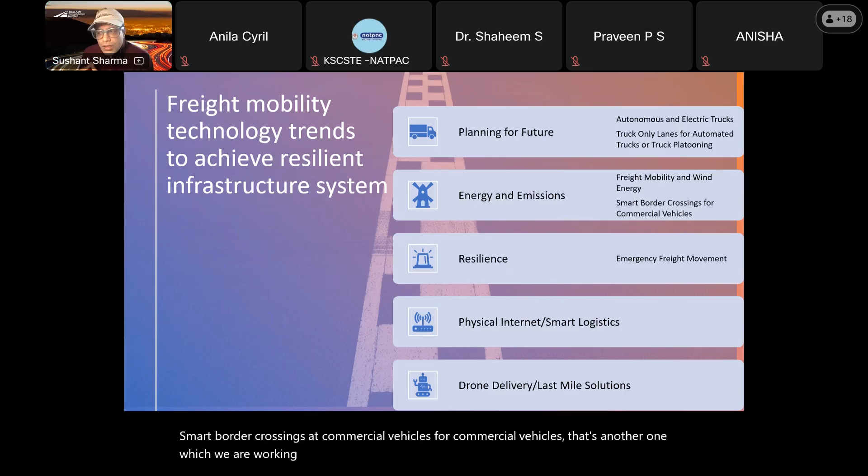Freight resilience, and resilience by itself, has become a big topic, and I think all of you will agree we've seen so much change in climate and weather over the years, and the infrastructure is still being pushed to its limit. We haven't thought about resilience before. We were more into sustainable solutions, but now we're getting into resilience, where we're thinking about what will happen in the next 100 years if the weather changes like this, and this is happening as we speak. So that's another topic I'll talk about under emergency freight movement.

And in the end, I'll conclude with some of the new topics that are upcoming; there were some good news in terms of logistics and freight. One thing is the physical internet, another one is drone delivery and last mile solutions. If you're in the world of freight, these are very, very big problems. And I'll go through that as well.

So if we take a step back, you may have heard of autonomous vehicles, right? It's a very big term. We are seeing those vehicles on the road. Electric vehicles, we are seeing those on the road as well, right? So both are happening more so in the world right now. And both these technologies are actually starting to overlap, where we are getting into the world of autonomous electric trucks.

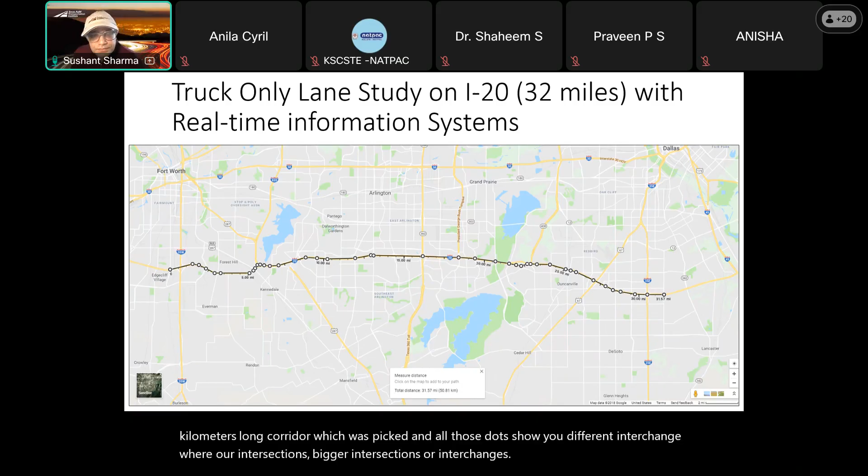So we started to question, what if this whole corridor is a truck-only lane, and they don't need to interact with cars? And that's a big problem, right? Interaction of trucks and cars becomes a safety and operational issue. The question was, what if there is a truck-only lane, how much efficiency can we derive out of it at the network level and at the corridor level, and is it even feasible? So to study that, we looked at something called multi-resolution modeling.

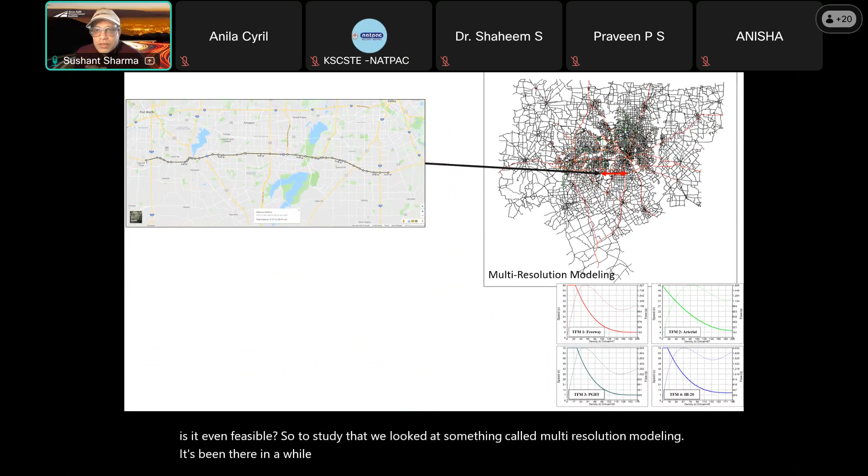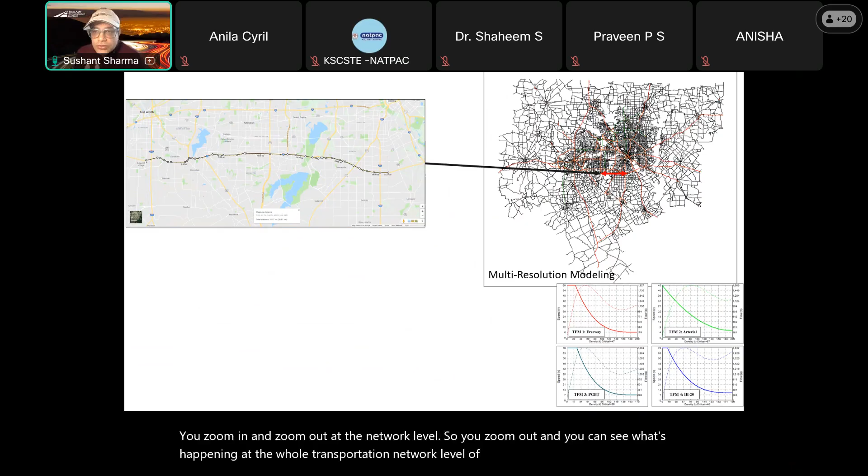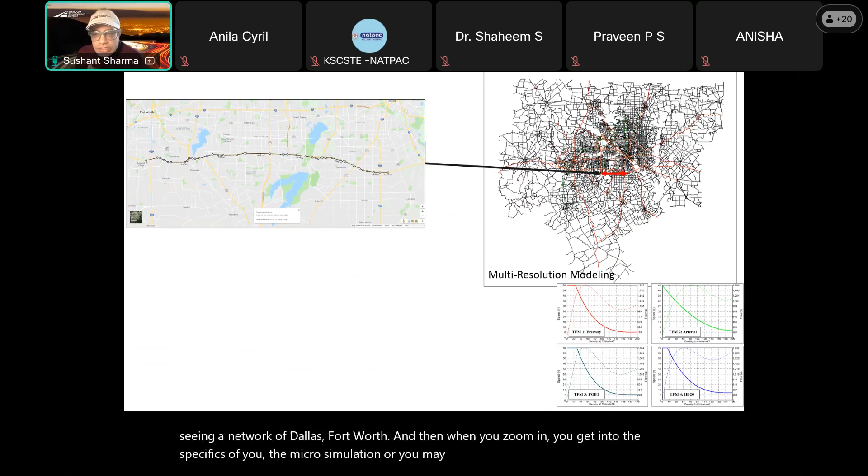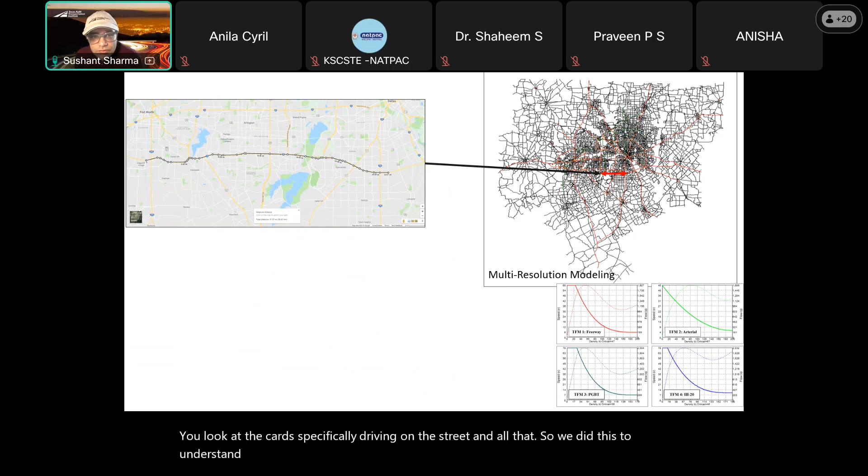It's been around for a while. What multi-resolution means is you zoom in and zoom out at the network level. You zoom out and you can see what's happening at the whole transportation network level of the city. Right now you're seeing the network of Dallas-Fort Worth. And when you zoom in, you get into the specifics of the microsimulation, or you may have heard the term traffic simulation. Then you look at the cars specifically driving on the street. So we did this to understand what kind of efficiency can be achieved by turning a corridor into truck-only lanes.

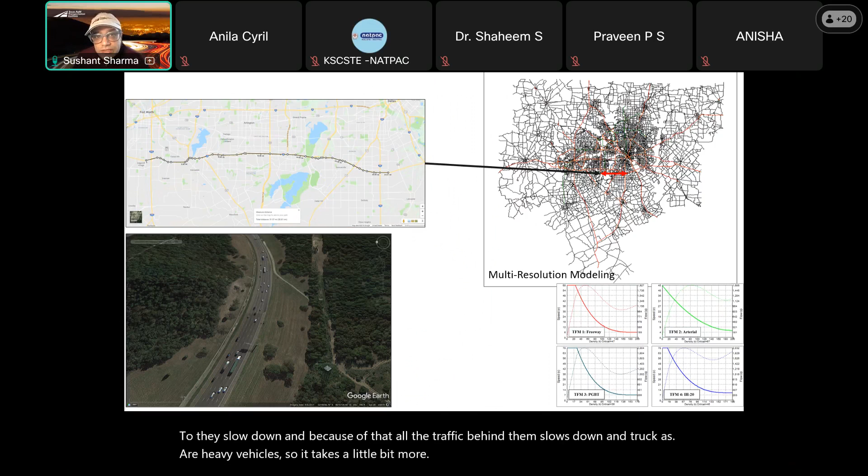And there are different bottlenecks throughout this corridor. For example, this image on the bottom left is showing where we have a very high gradient. Trucks have to climb this uphill, so they slow down, and because of that, all the traffic behind them slows down. Trucks, as you know, are heavy vehicles, so it takes a little bit more energy or acceleration for them to go higher up, and then it creates congestion, and it's going to be a big challenge to eliminate that kind of issue.

But this is what it is. It's the geography of the region. So the idea was, these are small different types of bottlenecks throughout this 32-mile corridor. What if we have truck-only lanes and we don't allow them to interact with cars and trucks? What will we see in terms of efficiency?

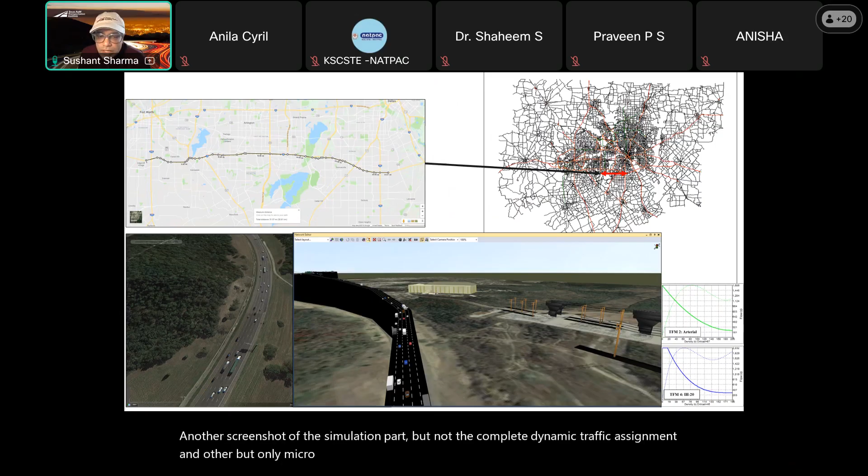Another screenshot of a simulation part, but not the complete dynamic traffic assignment, only micro simulation. And what we saw there was, okay, we can do that. We can do this at the corridor level. It kind of makes sense, but when we looked at the network level, it wasn't making much difference.

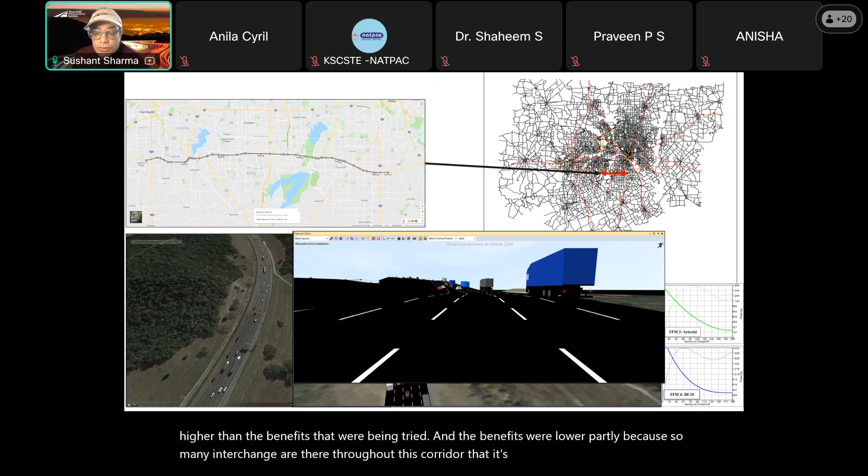Of course, it was kind of expected, but the reason it wasn't making a difference, even with such a long truck-only lane, wasn't the efficiency; it was that the cost of developing this infrastructure was higher than the benefits that were being derived. And the benefits were lower partly because so many interchanges are there throughout this corridor that it's impossible for you to gain the efficiency that you would like in the system.

So we could see, like, 10% of truck traffic will switch to these truck-only lanes, but that's it. The rest will be going to different parts of the network in the city, and that will not allow that much efficiency. We looked at the safety issues, how many crashes will be prevented by doing so. We looked at this problem from different angles, but overall the result was, we were not there yet.

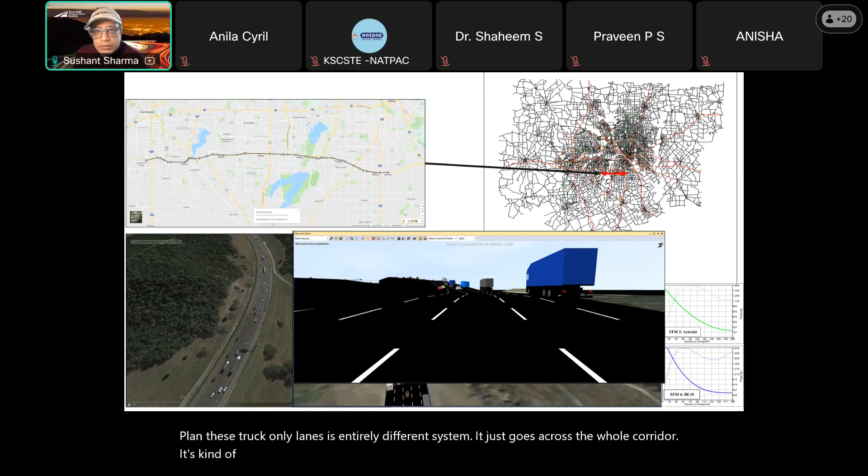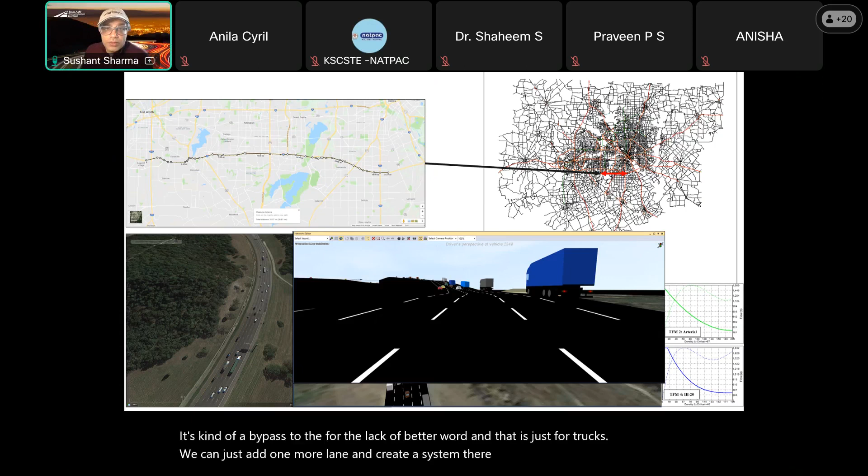We still have to plan these truck-only lanes as an entirely different system. It just goes across the whole corridor. It's kind of a bypass, for lack of a better word, and that is just for trucks. We can't just add one more lane and create a system there which will turn out to be good for autonomous vehicles or electric vehicles or regular trucks.

The second challenge which we face in the state of Texas is related to border crossings. I'm showing you the border of the US and Mexico. And there's a city named El Paso, and we have very high emissions in this city. Part of the reason is because these trucks are standing in the queue to cross the border, and they have to go through safety checks, documentation, and all that. And the typical delay in this region is like 1 hour to 2 hours.

So it's too high. And the problem we were trying to solve here was, what if these truckers and shippers have information ahead of time? How much is the delay at the border crossing? Will they be able to select the time of day they want to leave, and then reduce the congestion in some sense?

So what we did was develop an AI or machine learning-based predictive wait time and crossing time system. And there are 2 types of lanes at the border crossing: FAST lanes, where you already have the information of the people who are driving the truck, what's in the truck and all that, and then non-FAST lanes. They pay some fee for FAST lanes, so it's kind of a paid toll. But the question was,

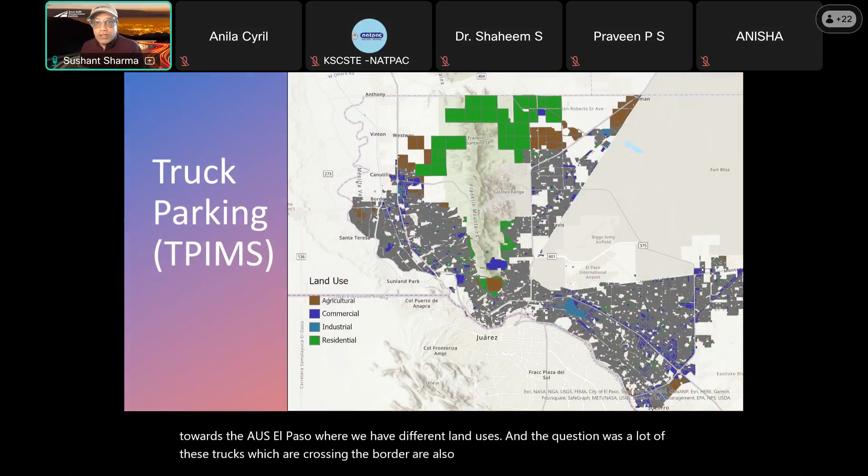There was another challenge related to it. So this is El Paso at the US-Mexico border. It's towards the US, El Paso, where we have different land uses. And the question was, a lot of these trucks which are crossing the border also have to park and stay in different parts of the transportation network in the city. How many trucks are staying within the city, for how long? And how do we calculate that based on the land use?

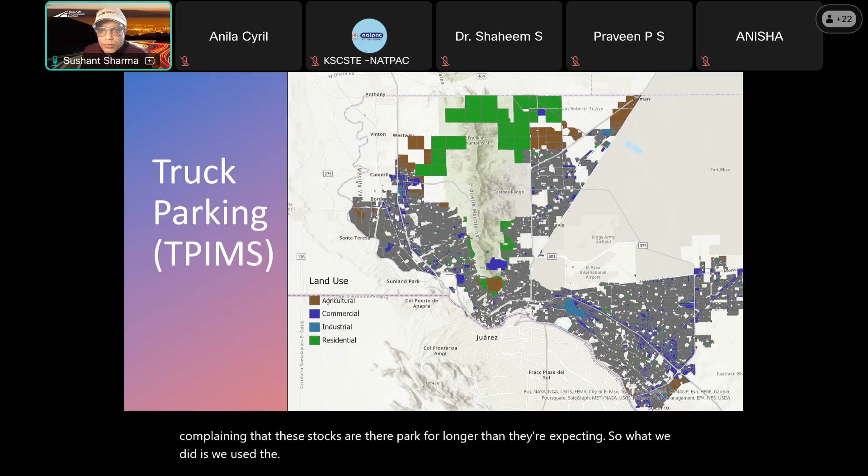So we were able to figure out some of the residential areas where there is a lot of parking happening, more than 12 hours, and there are other places where they're parking for a few hours. So we were able to figure that out, and then we were able to utilize that information, making sure that at least we know where truck parking is not available or what other issues are there. There are different issues there, why they are parking in these locations.

The third one, which I want to navigate into, and I mentioned this is related to energy security, right? So transportation of permitted wind energy loads. But before I get into this, if there is any question about the previous two works I described, I'll be happy to take it right now, or we can wait till the end, whichever way you want to address it.

Sir, can we continue with the presentation, or Shaheem sir? Yes, definitely. Continue with the presentation, and finally we will ask, sir. Okay, sure. Thank you.

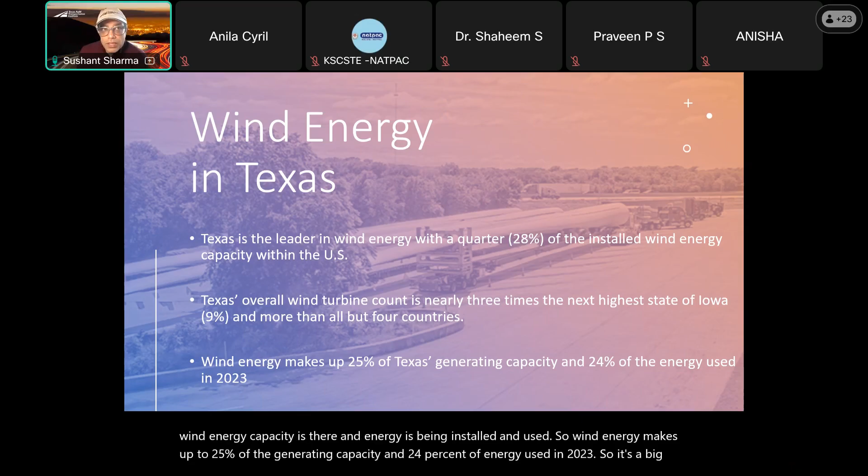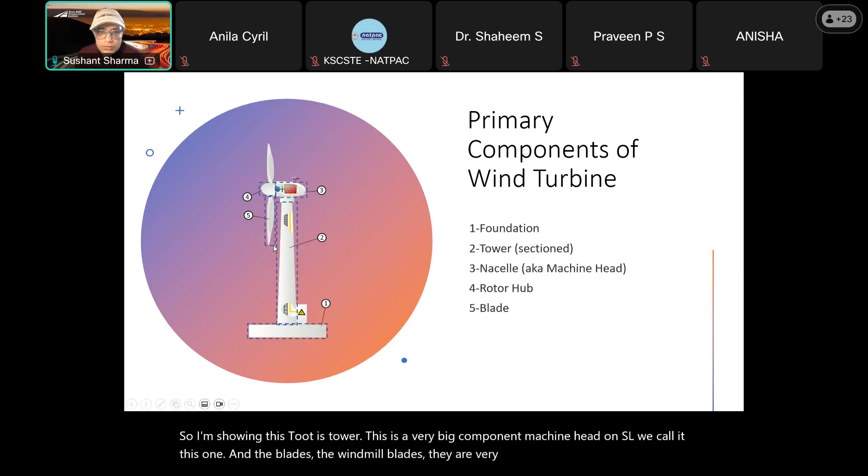The thing about wind turbines is it has different parts, and some components naturally don't come into transportation because they are built in the location, the field where they're going to install. But then there are bigger components like towers, right? So I'm showing this is a tower. This is a very big component. Machine head or nacelle, we call it this one, and the blades, the windmill blades, they are very long. They're big. So transporting them is by itself a big issue.

And what we're trying to do is understand where these loads are coming from, where are they going, what are the challenges they face while transporting, and also what are the trends over the years. So in the US, there's a term oversize and overweight, which means anything beyond the legal limit, which here is 80,000 pounds. If that exceeds, then you go under the overweight category. And there are also dimensions of loads, and if those exceed, you're oversized.

And most of the loads related to windmill blades and wind turbines come under oversize, overweight. And that data is available. Partly it's a safety issue, right? So you're carrying such a big load, which is beyond legal size and weight. It may cause safety issues. It may cause pavement infrastructure issues and all that. But it's also a necessary evil because it provides economic benefits. There are other benefits to it. It helps industry, energy security, and all that.

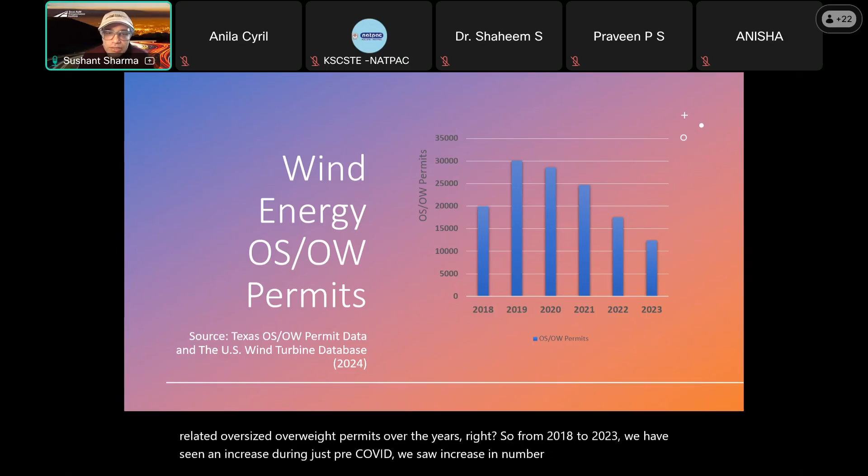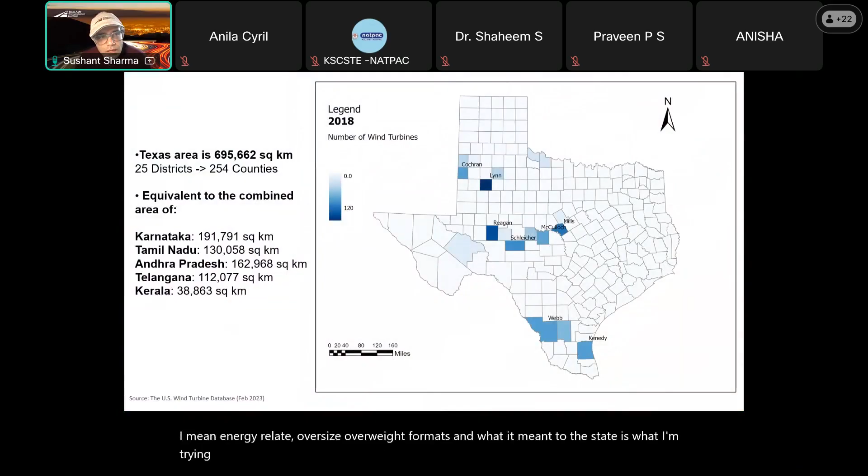So you want to make sure that these loads are able to transport, but then you want to permit those, and each of those loads moved across the state has a permit associated with it. So what I'm showing here is the wind energy related oversize overweight permits over the years, right? From 2018 to 2023, we have seen an increase. Just pre-COVID, we saw an increase in the number of wind energy related oversize overweight permits. And what it meant to the state is what I'm trying to address by mapping this. So Texas is like, it's equal.

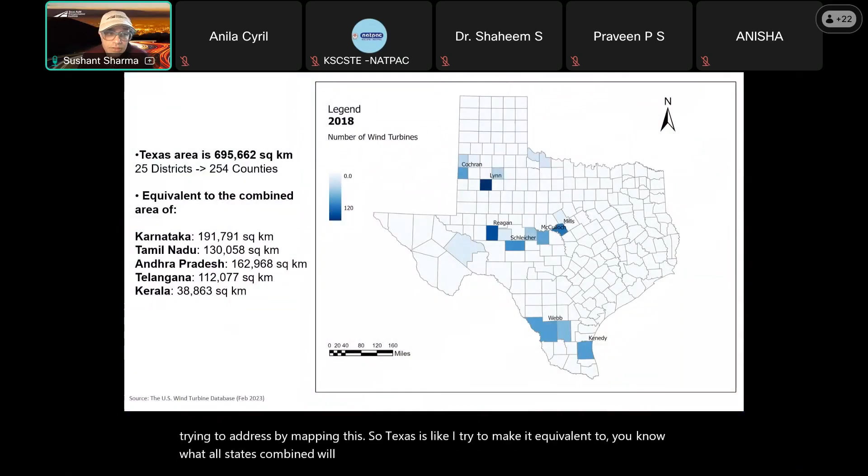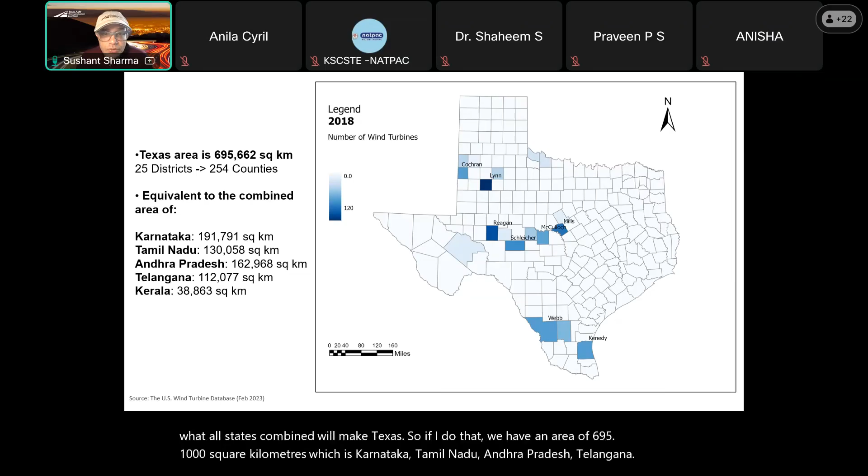I try to make it equivalent to what all states combined will make Texas. So if I do that, we have an area of 695,000 square kilometers, which is Karnataka, Tamil Nadu, Andhra Pradesh, Telangana, Kerala together. That's how big the state is. And what happens here is

there are different districts in the state, and then there are counties. So there are 25 districts into 254 counties. And what I'm trying to show here is the number of wind turbines installed in different counties. So the name of the counties where more wind turbines are, we're showing it here.

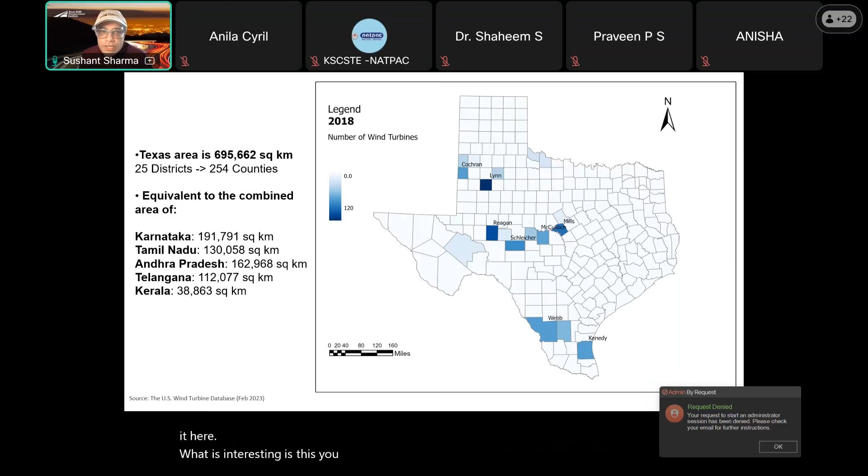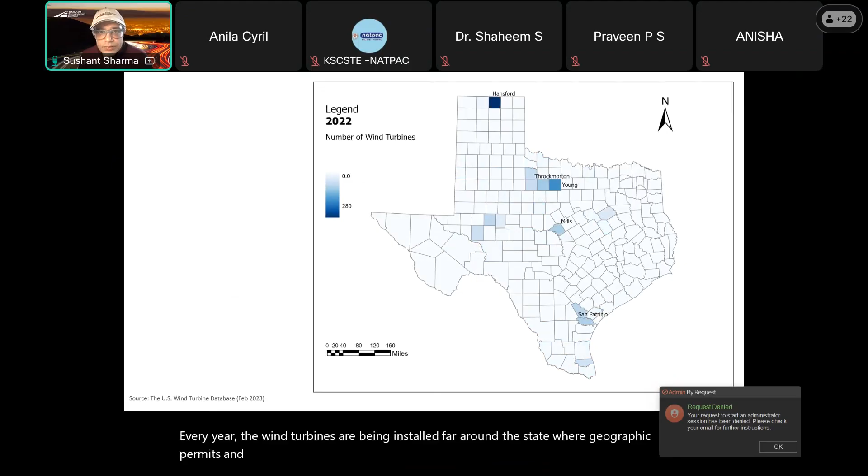What is interesting is this: you will assume that the counties where wind turbines are installed, they remain constant, but that's not the case. Every year, the wind turbines are being installed all around the state where geography permits, and the wind is there for it to really produce something.

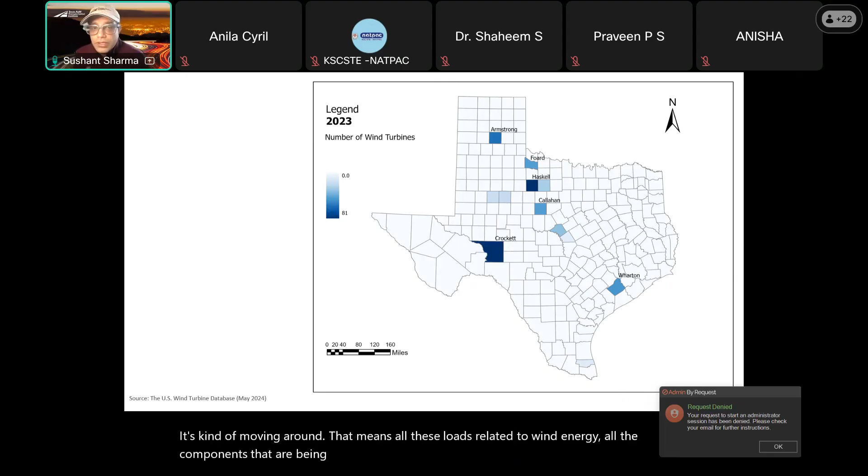So the trend showed us that one, the wind turbines are in a particular region. We can see the number of wind turbines that are being installed every year does not stay constant. As the county gets saturated with wind turbines, it keeps on moving, and it's not like just the next county. It's kind of moving around. That means all these loads related to wind energy, all the components, are also being transported to different places. So either their origin or destination is over there.

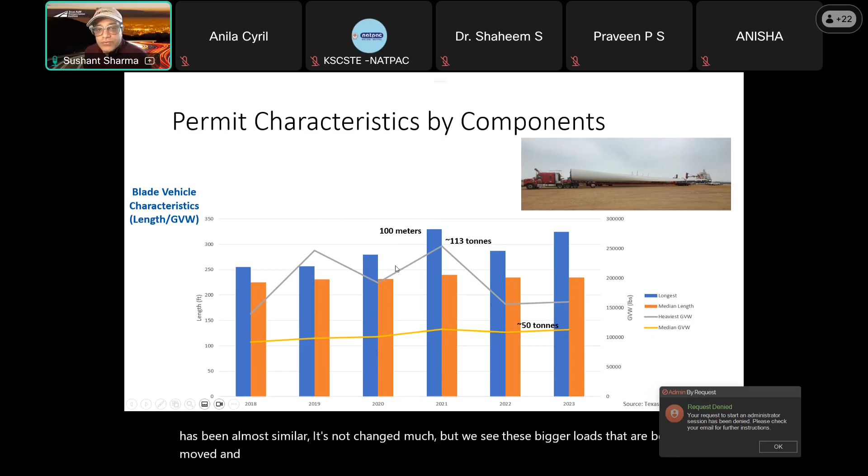So what we see in 2021, we had blades which are like 100 meters long being transported, and the weight was around 113 tons. So it was very heavy compared to a typical load seen on the road. And then same in terms of median gross vehicle weight. The trend has been almost similar. It's not changed much, but we see these bigger loads being moved, and infrastructure is not built specifically for these loads. They are made for typical loads we see on the road.

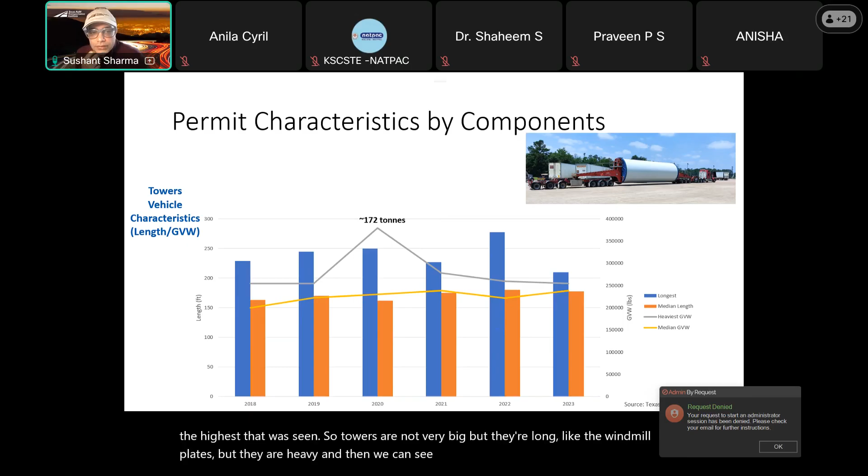Same goes for towers, where we see towers which have a very high weight. 172 tons was the highest that was seen. So towers are long, like the windmill blades, but they are heavy. And then there are machine heads, which can be heavier than the towers and the windmill blades, going up to 230 tons. This is just an example of one load here, but these numbers are very high every year. They're in thousands being transported every month, and eventually multiple thousands in the year.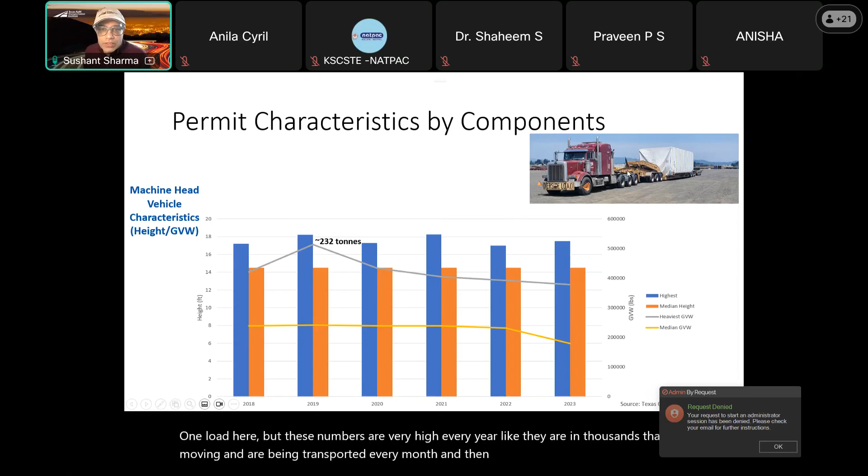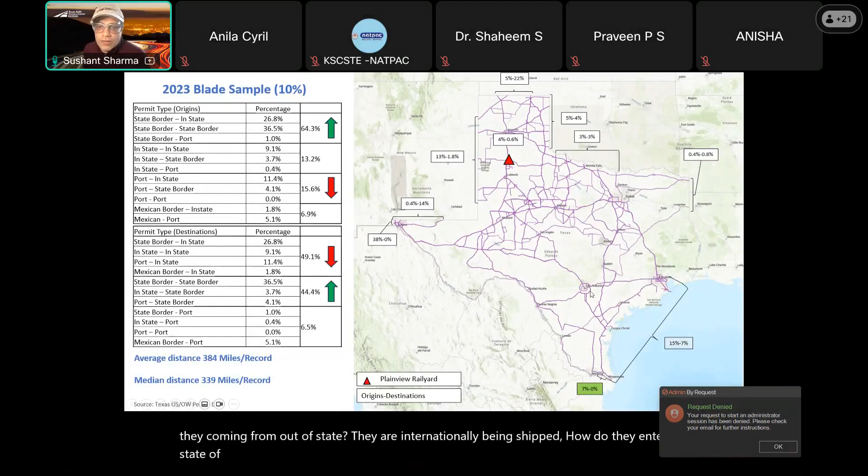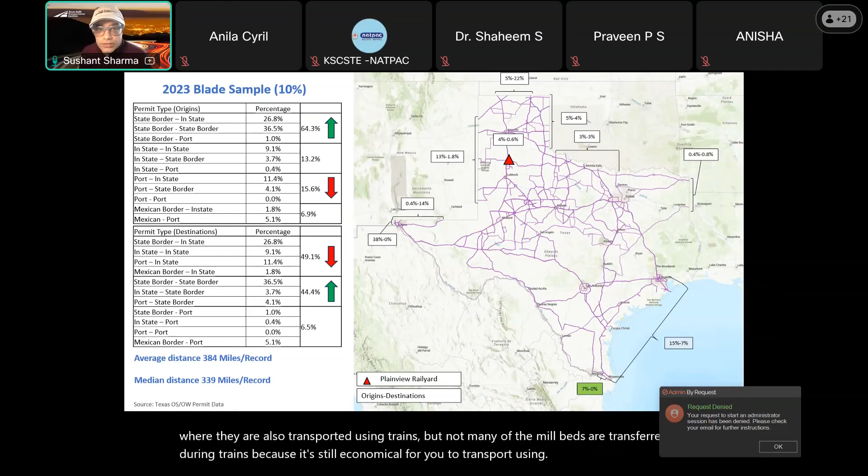So what we do is we try to understand where these loads are coming from. Are they coming from out of state? Are they internationally being shipped? How do they enter the state of Texas? So what we have is a map of different roadway networks. This is just the rail, where they are also transported using trains, but not many of the windmill blades are transported using trains because it's still economical to transport using these oversized overweight trucks, the specialized trucks that carry these.

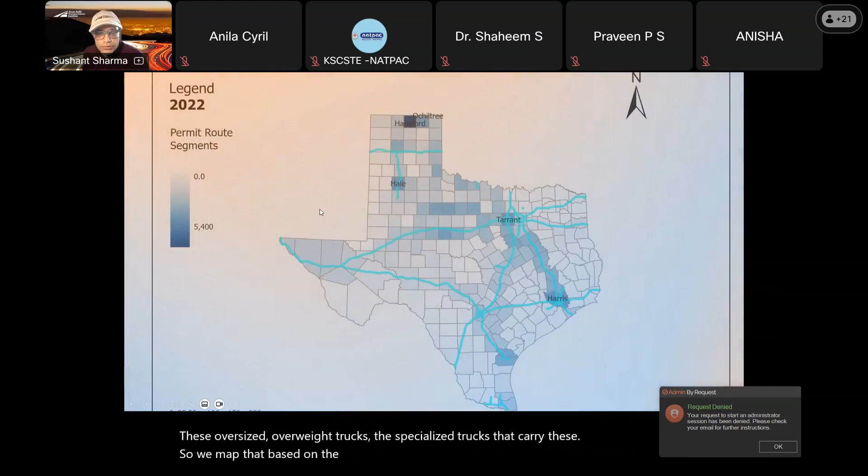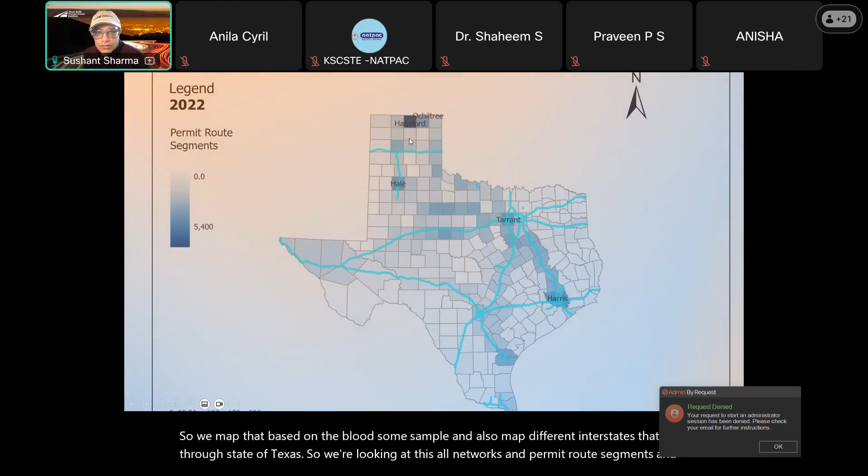So we map that based on the sample, and also map different interstates that pass through the state of Texas. So we're looking at all these networks and permit route segments, and this blue is showing where more load is moving in terms of wind energy related loads. And these are the interstates. These blue are different interstates that pass through the state of Texas.

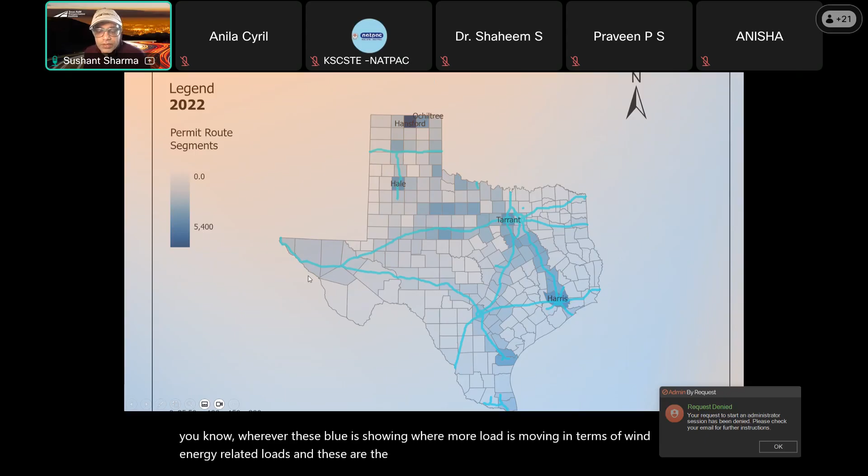So in a nutshell, there's a lot of wind energy related movement happening in Texas. We are trying to understand the infrastructure related issues, how the existing transportation infrastructure is ready, because these loads require a clearance height between bridges. They require those bridges to carry that much weight. They should not damage the bridge and pavements too much.

So those are the infrastructure issues, transportation issues that we try to address or understand using this information that comes from the data. And then we provide that information to, in the US, it's state DOTs, equivalent to PWD, I'll say, where we try to work with them to understand the infrastructure needs and what needs to be built.

I'm going to switch gears here into freight resiliency, but at the same time looking at the perspective of COVID and emergencies. And this was more of a policy research. What happened during COVID was there was a need for emergency supplies. During COVID, if you're trying to get those emergency or medical supplies within the legal limit, it was a little bit inefficient because you can only carry some weight.

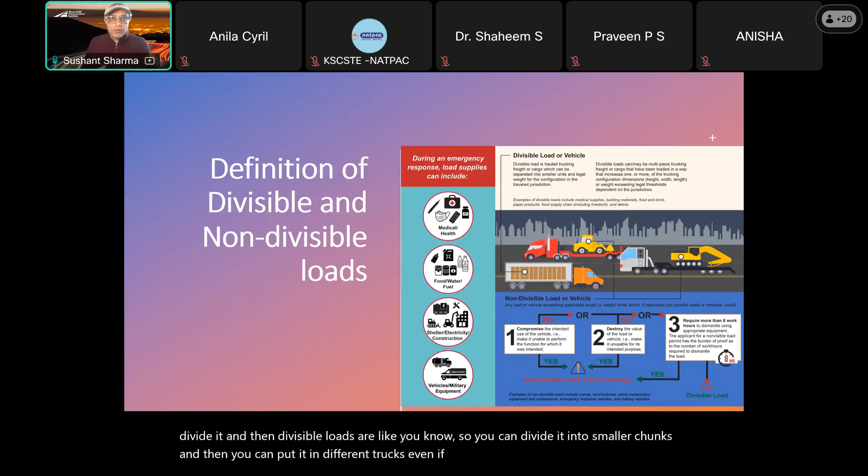We talked about how there are two types of load, divisible and non-divisible. Non-divisible, if you think of it, is a big load like a crane, which is on behind a truck. You can't divide it. And then divisible loads are ones you can divide into smaller chunks and put in different trucks, even if you go above a particular threshold of gross vehicle weights and limits, but you can divide that. So we talked about those.

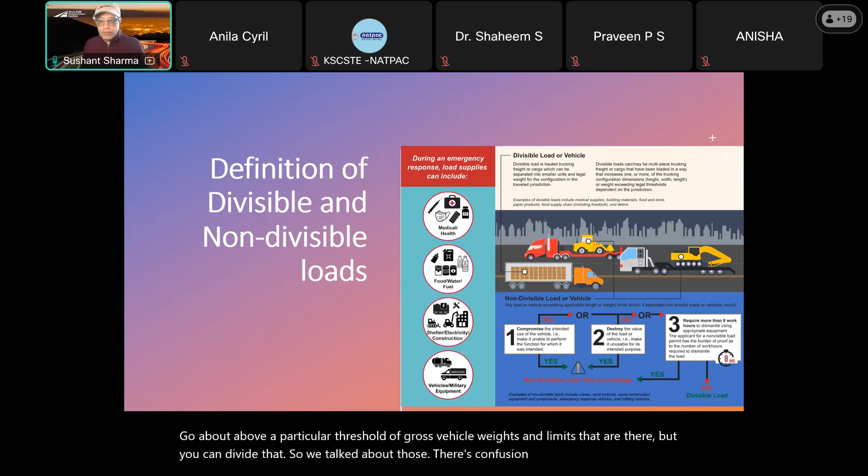There's confusion about what can be considered divisible and what can't be, and we developed this roadmap for success. Like, how do we go about it? So how do we develop a consistent framework? What are the promising practices? What are successful ways that have been tested in the past?

And then we got into the emergency management cycle, how this should be addressed whenever there's an emergency, how these critical loads need to be moved during emergencies. Some kind of pre-disaster plans, what we should do before a disaster, and then post-disaster plans, what we should do after a disaster. So these were provided as part of a guidebook that was developed, and also a final report that came out of this study.

So overall, what we tried to do here was understand what are the policy level and regulation level issues. There was some data, but not enough to do anything related to data analytics. So we provided some input there.

Now, the question related to freight mobility is, what is the future of freight mobility? What's going on right now in terms of freight? And one thing we have been able to see over the years is a need for sustainable freight, right? And the term that has come across, it's kind of hard to digest, is physical internet, but you have to think about it in terms of logistics, in terms of the containers you may have seen on trucks or in the shipping yards. And the idea is very similar to that.

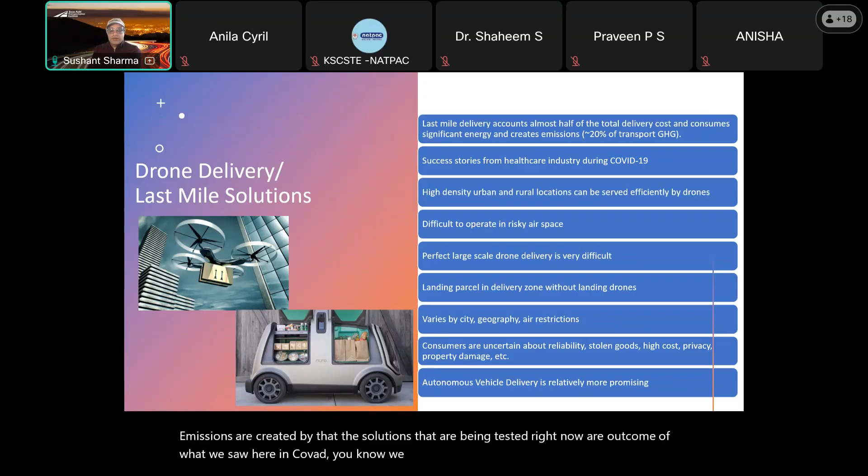We saw that drones are good as long as they are away from the risky airspace. They're able to efficiently deliver some of the things. Then we have these new vehicles that are actually delivering groceries and all those needs to consumers. They're called autonomous vehicle delivery. So those are some very interesting ideas that are being worked on, and some of them are being implemented.

So I still see that there are some solutions related to drone delivery, which I personally witnessed in my neighborhood, being utilized. Although I'm not a big fan of it, because your drone comes in your backyard and delivers something. What are the chances that, first of all, the delivery will be perfect, depending on how fragile the things are, and second, is it safe enough if it's in your front yard? That's another problem. And there are other things, but these are solutions that are being tested in terms of last mile delivery.